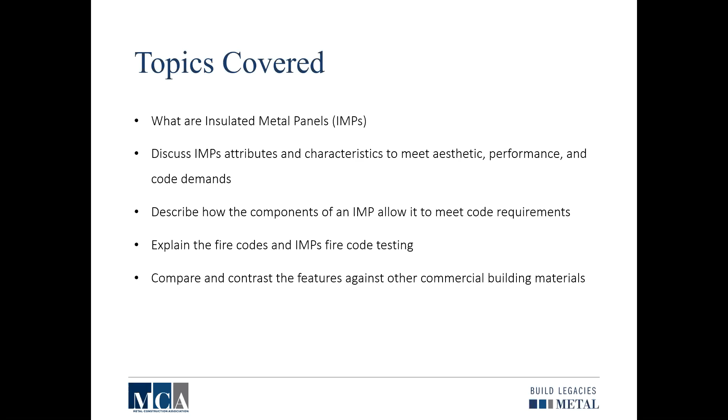So just to recap, the IMP Alliance is part of the MCA. The IMP Alliance is comprised of various manufacturers within the industry that not only manufacture the product itself, but also some of the key components, such as Huntsman and BASF, and Sherwin-Williams from a coatings perspective. Our focus is really twofold: we have a technical division as well as a marketing committee. The technical committee focuses on performance testing, initiating research, and increasing the use of insulated metal panels in the building envelope. Our marketing group reaches out and gathers that information, getting it into individuals' hands to help educate how IMPs could be beneficial in the marketplace.

So we'll get right into it. What is an IMP? We'll watch a quick video about what an IMP really is from an application and performance standpoint.

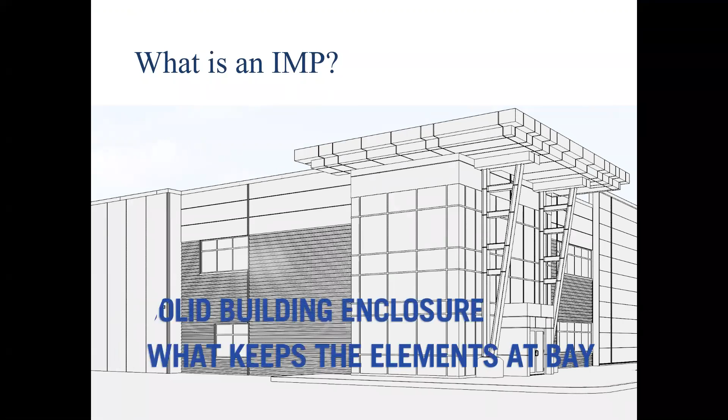A building enclosure plays a crucial role in dividing the interior and exterior environments to keep what's inside in and what's outside out. These elemental forces, known as hygrothermal loads, include water, air, vapor, and heat. Insulated metal panels, or IMPs, create a single barrier against these forces across the entire building envelope, replacing complicated multi-component assemblies with a simpler solution for architects and contractors alike.

So as you can see, from an application standpoint, it really is a single building component that can be applied in various ways and orientations to really change up the design of your product. Let's take a deeper dive into how an IMP is actually manufactured.

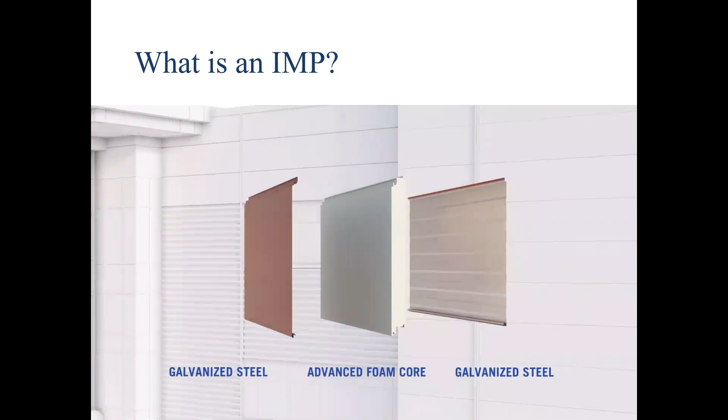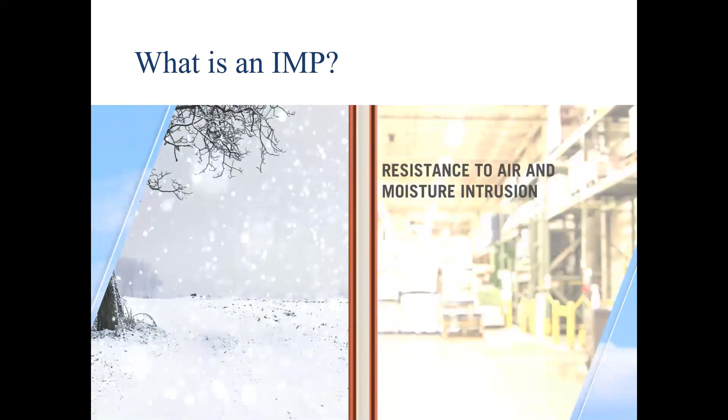Composed of two sheets of cold-rolled galvanized steel and an advanced polyurethane foam core, IMPs provide a pre-manufactured perfect wall. This metal and foam composite construction creates a rigid panel far stronger than the individual parts. The perfect wall can be used in all climates, including cold, mixed, hot, humid, dry, and marine environments. The exterior water, air, and vapor control layers, as well as the outboard thermal control layer, are optimally configured to provide superior resistance to air and moisture intrusion, including rain and groundwater, and highly efficient thermal insulation via superior R-values.

So just a quick recap, an insulated metal panel is a lightweight system that can be applied either to your exterior wall or roof application. It is an insulating foam core sandwiched by two metal skins. They come in a wide variety of colors, widths, profiles, finishes, and can even be formed and curved into various different shapes and sizes.

Walls can be ribbed, fluted, or planked, as you will see here in a few minutes. Flat walls can be textured or striated. IMPs bring a level of performance to the overall building envelope that is efficient, sustainable, and easy to install. They are thoroughly tested and certified for performance standards, giving you the confidence you need for your building envelope.

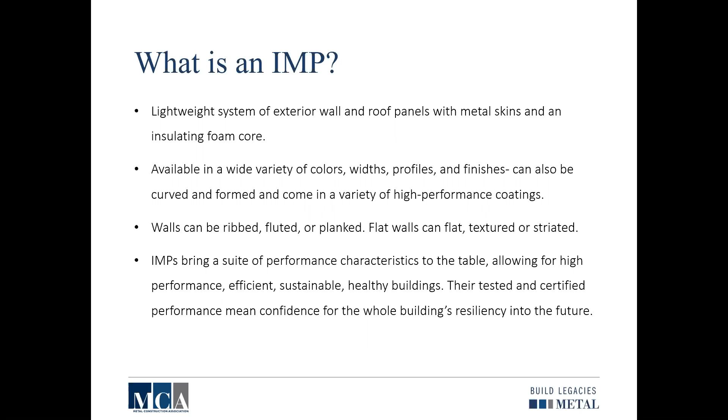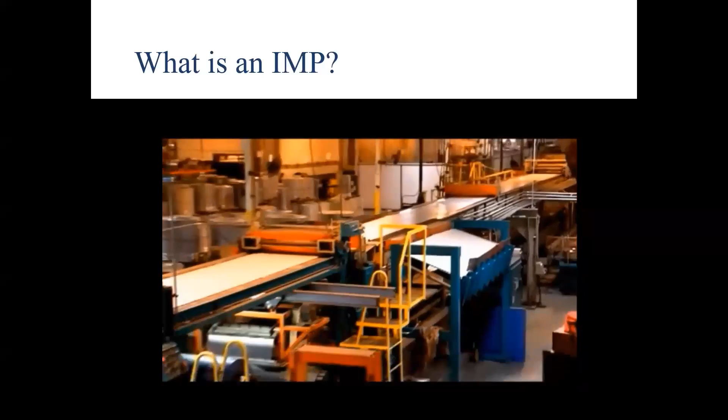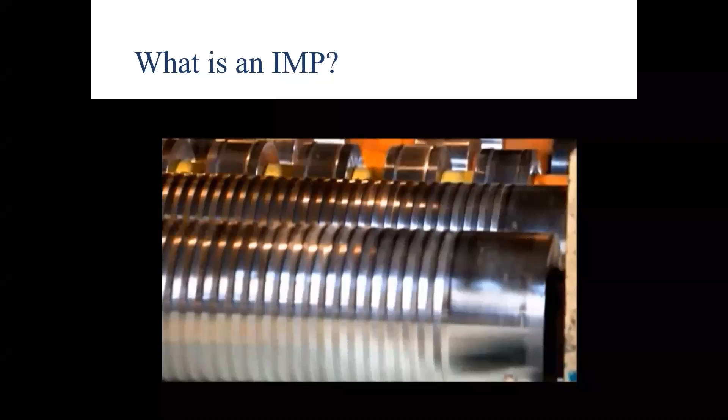Now, one of the great videos within this entire program is how this insulated metal panel is actually manufactured. So I'd like to take a moment to show you a brief video regarding how an insulated metal panel is produced. You can see here on the left side of your screen, the coil comes uncoiled on an uncoiler, goes directly into the production line where there are various dies and roll formers that fold the profile of the panel from the middle outward. You can see here in this video that they are separated by a little bit of a space.

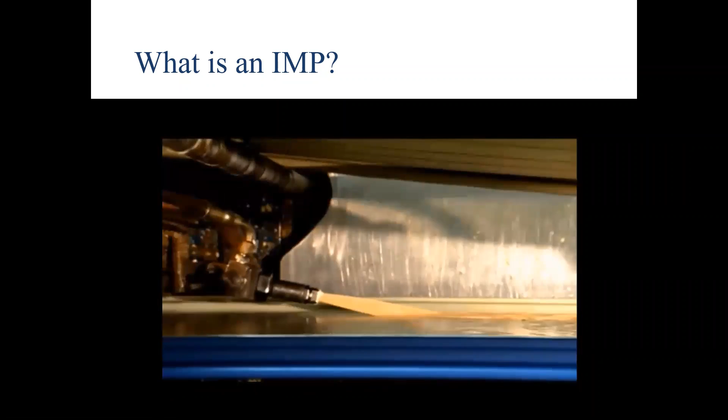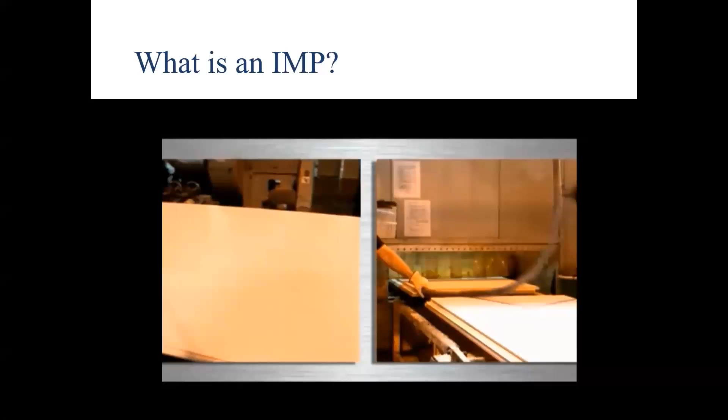Here you can see where an oscillating head will apply a liquid. It's actually the polyurethane or polyiso core. It has a rise to it as it's going through the line, and the liner side or the face element is sandwiched into the actual production. The product itself is cut to suit to meet your various project requirements, continuing down the line to make sure it's gone through various quality checks and offloaded to be bundled per your project requirements.

The only thing I would recommend if you are looking at longer panel lengths, make sure that your job site requirements allow for easy installation. Longer lengths require additional manpower to install, and of course are a little bit heavier. So make sure that based upon your design intent, the longer lengths are keeping within the installation process.

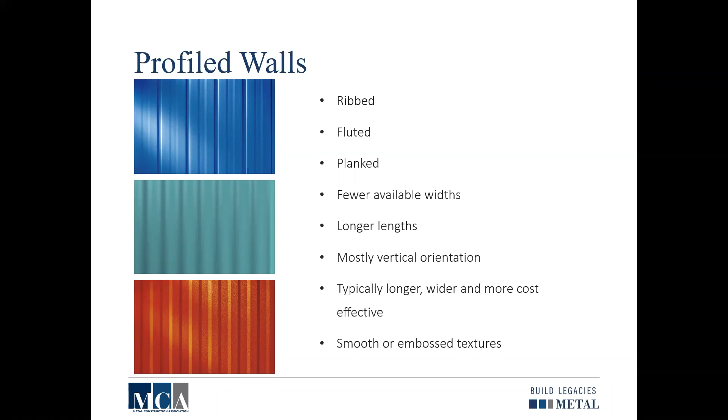Now, from a horizontal application, we typically see flat as the preferred method when horizontal panels are installed. The flat texture is also available as textured, where it's like an embossed or stucco finish, and the striated option is also available, as you can see there on the top left. These also come in variable widths, a little bit more customized, so the ranges can vary as far as what the availability on widths is. Again, horizontally is typical, but it can be vertically installed. These products typically are shorter, narrower, and can be more expensive depending on production capabilities and requirements.

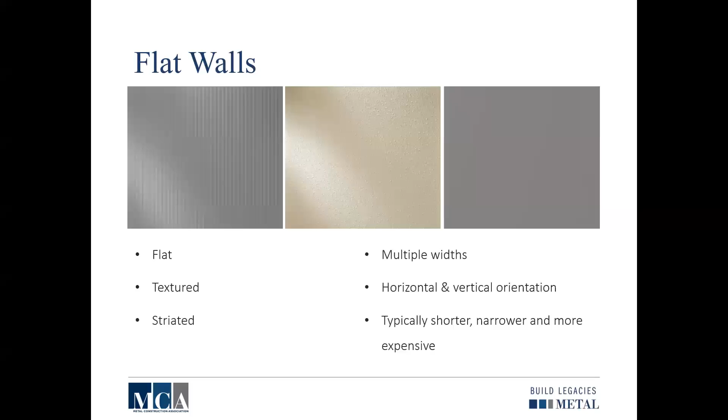Now, from a type of building standpoint, insulated metal panels can really be installed in any application. We have architectural, which is going to be your high-end building product, your more unique designs, more customization. We've got commercial and industrial, where we're looking at more of those vertical panels. We've got cold storage, and the product being installed in a cold storage environment - because of the thermal capabilities of insulated metal panels, that's really what drives the product to be good for cold storage application. One item that we won't really cover today, but is still available, is insulated roofs. Insulated metal panels can be placed in a roof application for thermal performance and structural integrity as well.

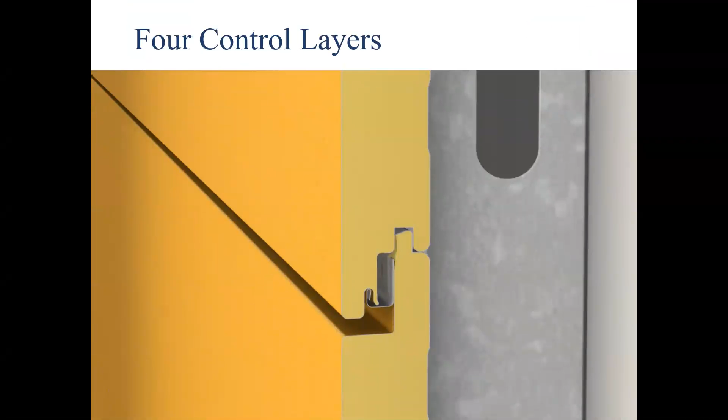So why IMPs? Well, first off, it is the singular building product that provides 4 control layers. I'd like to take a moment to show you another video in which we show how the product is actually installed. You can see here we have interior gypsum being installed on the inside of a stud frame, and then the panel itself is being installed horizontally over the stud framing, directly to the stud framing. There is no additional weather-resistant barrier or exterior gypsum required for the actual product. As you can see here, we have 4 control layers. The product itself is going to provide air, vapor, water, and thermal performance control.

On the liner side is a pocket which has non-curing butyl, and that non-curing butyl is continuous within that liner side joint, and that really provides the air, vapor, and water performance. The thermal control is provided by the polyiso or polyurethane core that we've mentioned earlier.

The exterior metal skin is really your first layer of defense. That's going to allow for any wind-driven rain that might be hitting the product to not be absorbed within the foam. The foam itself is usually about 90% or above closed cell foam, so it's not going to be absorbed. You don't have to worry about any mold or any type of water infiltration.

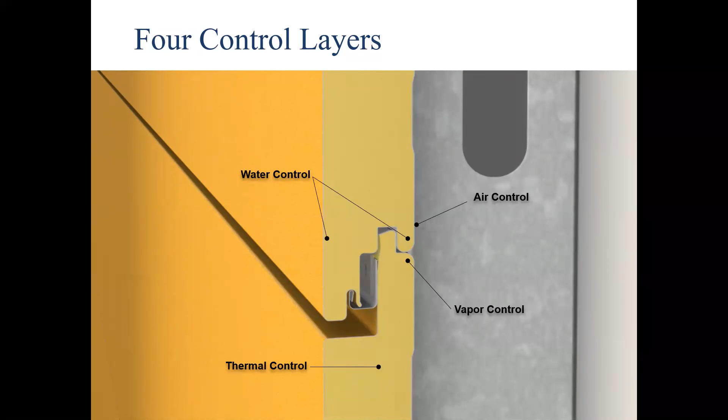Each individual manufacturer has a unique design within the product and how everything comes together. The clip system is proprietary to individual manufacturers, but for most products it is concealed, where the secondary panel comes down over and hides that fastener. Because of the way the joint is designed, it does not allow for any water to be pulled through into the interior of the building.

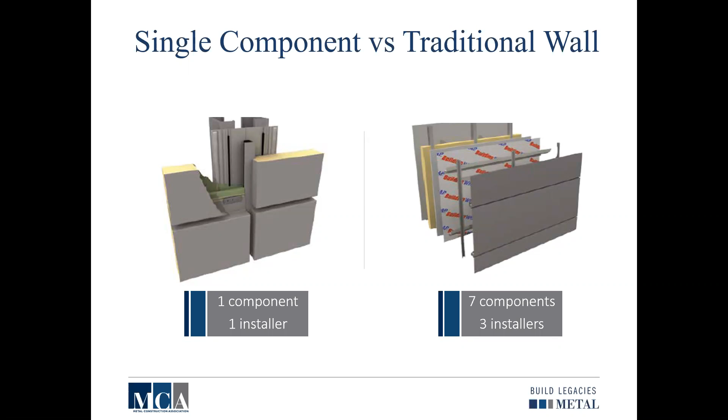One of the key components to insulated metal panels is the installation. Whenever we're looking at insulated metal panels on the exterior side of a building, we've got one component. We're putting together the insulated metal panels and the accessories associated with that product. There's one installer. With a traditional wall system, we have 7 different components, and there's coordination required with 3 different installers. So a lot of time needs to be taken into account with a traditional wall system for coordination and timeline. With insulated metal panels, it's quick, easy, and efficient. You install the insulated metal panel and move on to the interior from there.

Insulated metal panels go through extensive testing. Whenever we're looking at water and air performance, which is always a very hot topic with wall consultants, we want to make sure that we're providing every testing necessary to ensure the building product is doing its required performance testing. So we have ASTM E283 and ASTM E331, the two standards for air leakage and water penetration for not only insulated metal panels but any curtain wall application as well. If you do have a question or concern regarding performance, always ask the manufacturer to provide that level of test reports if required.

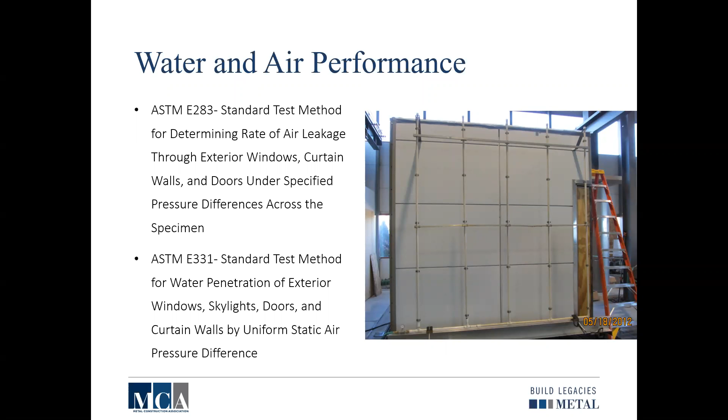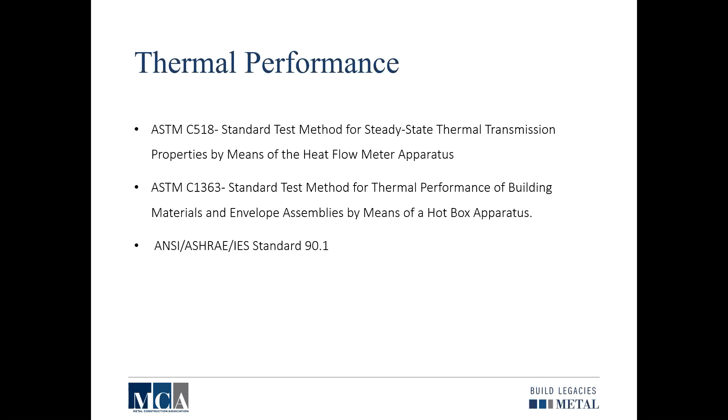From a thermal performance standpoint, we have ASTM C518 and ASTM C1363. 518 is going to be testing the product itself for an R value. 1363 is more of an assembly test in which we're testing the joints associated with the product. No matter what testing is conducted, we're always following ASHRAE standard 90.1. From 90.1's perspective, we have different zone requirements which drive the different R values required within the product.

Insulated metal panels can be installed in any application. They come in various depths so that we can accommodate the different requirements in R value. For example, down in Florida, you might only need a 2-inch panel to meet code, whereas up north you might need something a little thicker, like a 3 or 4-inch panel.

Whenever it comes to ASHRAE 90.1, the frequently asked question that comes up is about meeting the code requirements. We're looking at this from a prescriptive method, meaning that we're not looking at the actual metal frame wall construction, 16 inches on center, and the R per inch plus a CI, 7.5 in some areas. What we're actually doing is turning the page. I always recommend turning the page within ASHRAE 90.1 to the prescriptive method, where we're looking at the U factor. The product itself will be applied as an assembly, and therefore should be looked at from an assembly standpoint for thermal performance.

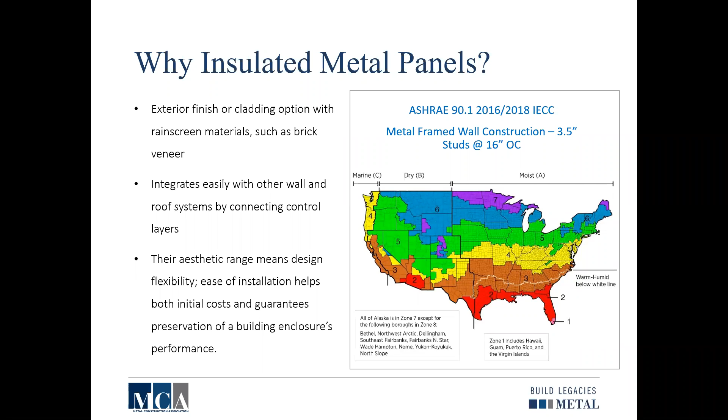Structurally, we are always focused on ASTM E72, which tests the capabilities of the product itself. E72 tests the product to failure under different conditions and methods, focusing on the product itself. ASTM E330 is typically partnered with ASTM E283 and E331 for testing. Whenever we're testing to an ASTM E330 standard, we're picking a wind load requirement and testing to that wind load.

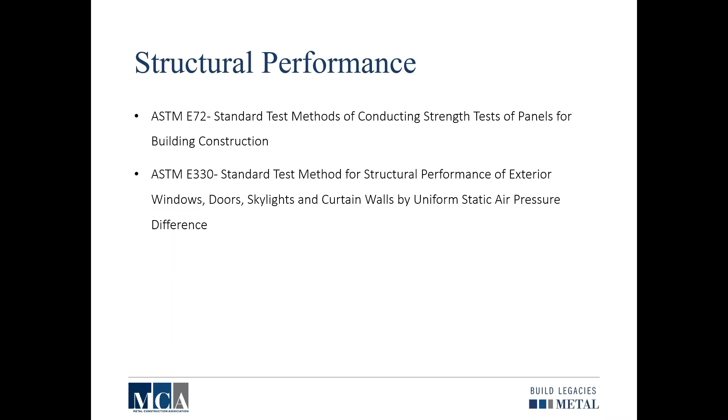One of the items that has become a more frequently asked question with insulated metal panels is the fire code. First thing to mention is that IMPs fall under Chapter 26 of the IBC, which is the foam plastics portion. A lot of people think that it might fall in Chapter 14 with the MCMs.

Although we start in that chapter, we tend to go ahead and float over into chapter 26 fairly quickly whenever we get into the exception criteria of requiring a foam plastic. So insulated metal panels go through the stringent testing of chapter 26. Every test that is listed within that chapter will go through here today.

ASTM E84 is going to be your standard test method for surface burning characteristics. Usually this is based upon a flame spread and smoke development number. The flame spread cannot exceed 25. The smoke development cannot exceed 450. Those tests are conducted on the product in itself.

NFPA 259 is a potential heat of building products. This is also a key component to a portion of NFPA 285 that we'll talk about in the next slide. NFPA 268 is the standard test method for determining ignitability of exterior walls, commonly referred to as ignition.

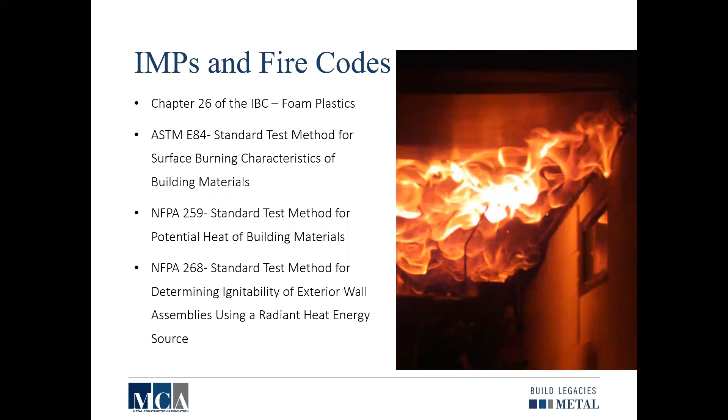So from a fire code perspective, we have NFPA 286. This is going to be your room corner test, where our crib you can see on that left picture is installed on the interior side of a room, and it's set on fire to determine how the flame would propagate either up the wall or along any of the intersections. So the corner condition as well as the roof to wall condition where the two meet.

NFPA 285 is probably the most talked about test required in the industry so far. 285 is a multi-component wall assembly for the evaluation of flame propagation. When the product is installed, we not only test the fire from the interior of the two-story building, but also on the exterior. So there's an interior and external burner that is sandwiched on either side of the product.

The way in which the product is tested is how it's installed. There's a window opening within the test, and every component really is a focal point. Based upon the standard, there needs to be certain criteria that is maintained within the test to go ahead and pass. This is a pass-fail test.

And that's going to be, if the flame in itself hits 10 feet above the window head, if the temperature at that 10-foot marker exceeds a specific number, if there's thermocouples located throughout the wall assembly to where they have certain criteria that needs to be maintained. If the product in itself is tested and passes the 30-minute test, then you get the pass of the NFPA 285. The key component with 285 is that the wall in itself must be constructed as you typically see.

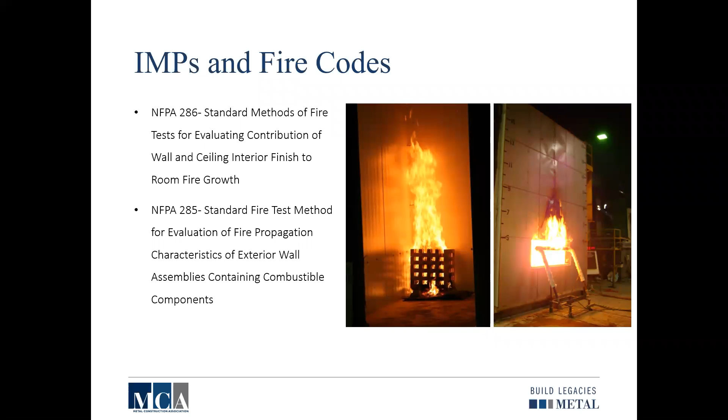In addition to the extensive testing that insulated metal panels go through, there is a special approvals portion of Chapter 26 where some of the special approvals mention factory mutual or underwriter's laboratory. There are independent third-party entities that will evaluate the product in itself, not only from a product specific perspective, as in the case of FM 4880 and explaining how the product handles under fire properties, but also from an application standpoint with FM 4881, which is a structural test. 4471, as listed here, is for roof application.

Underwriters Laboratory have similar tests in regards to their requirements. And Factory Mutual and Underwriters Laboratory are not the only two entities that will allow for a certification, labeling, and listing program. There are other third-party certification bodies that will review the product in itself and provide certification to code compliance.

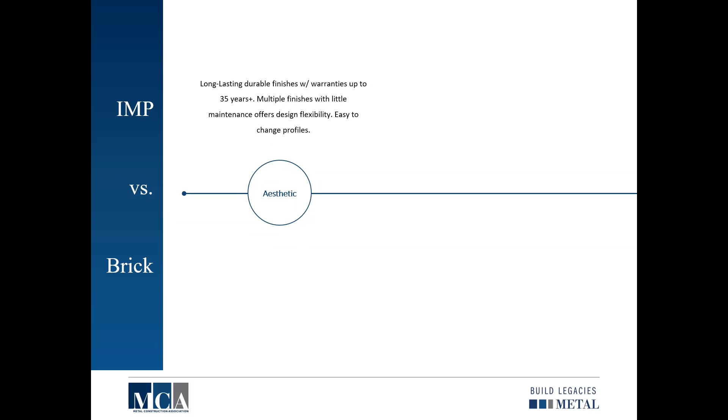So whenever we're comparing IMPs to other systems, we'll just take it from a high level. IMPs versus brick. From an aesthetic standpoint, IMPs are long lasting. We mentioned as far as the finishes, the maintenance on the product in itself is very minimal, and yet the product is still providing that design flexibility. From a brick perspective, we've got a large range of solid or variegated colors. Typically they're matte finish. They can be painted or stained after finish from an aesthetic standpoint.

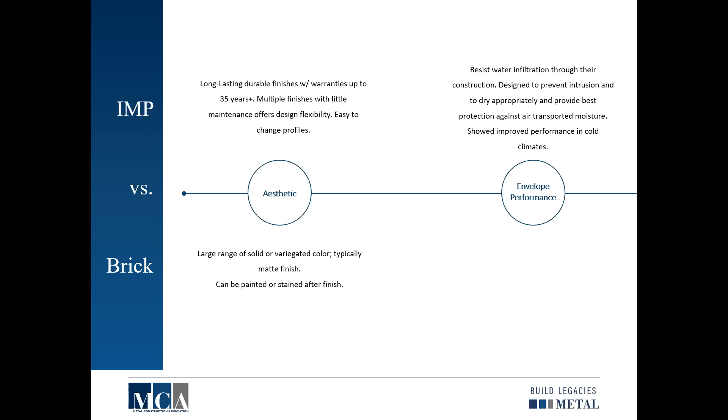Envelope performance, we're looking at the IMPs as the main line of defense. It resists water infiltration through the way in which the product is designed and constructed and installed. Installation is critical. It's designed to prevent intrusion of water and protect against air, moisture, and vapor barriers. It can be installed in any cold climates as well.

From a brick perspective, you're still looking at that brick. It can absorb water. It does go ahead and dry out through evaporation, but you still require an additional backup system to provide that insulating property for the wall application and the thermal performance.

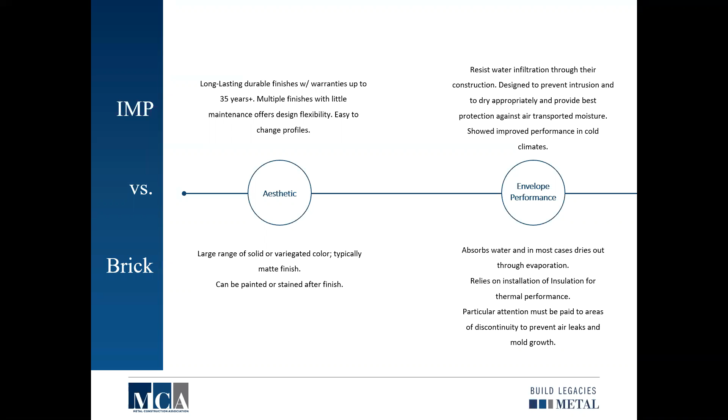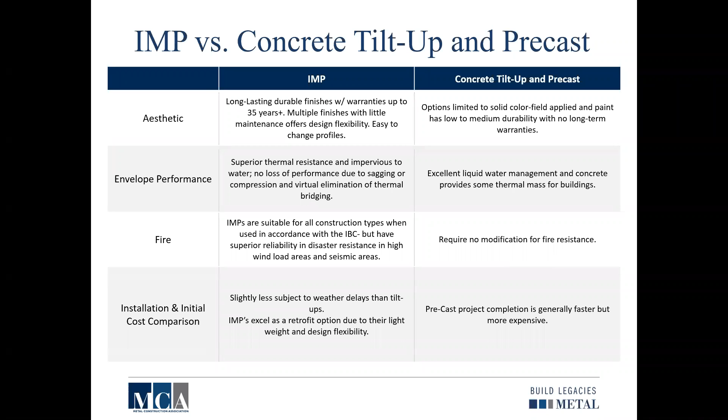From an install and initial cost comparison aspect, right now insulated metal panels are subject to less weather delays than tilt ups. They are excellent for a retrofit option, and with the concrete tilt up and precast, the project completion is generally faster, but can go ahead and be more expensive.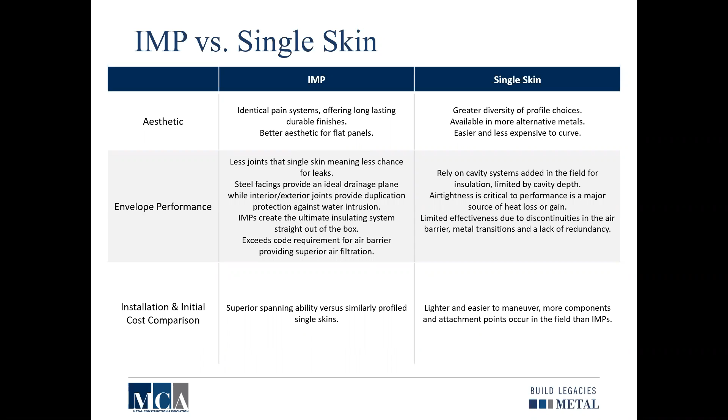There are steel facers that provide an ideal drainage plane, while the interior and exterior joints provide protection against water intrusion. From an installation and cost comparison, insulated metal panels are superior because they are a structural building product, meaning that they can span greater distances versus a similarly profiled single skin product.

So just to recap from an IMP performance perspective, IMPs usually come in a wide variety of different widths, depths, lengths. We can go ahead and apply them in a lot of different applications, from architectural, commercial, industrial, cold storage, and roofing. It is a single component that provides 4 control layers: air, water, vapor, and thermal performance.

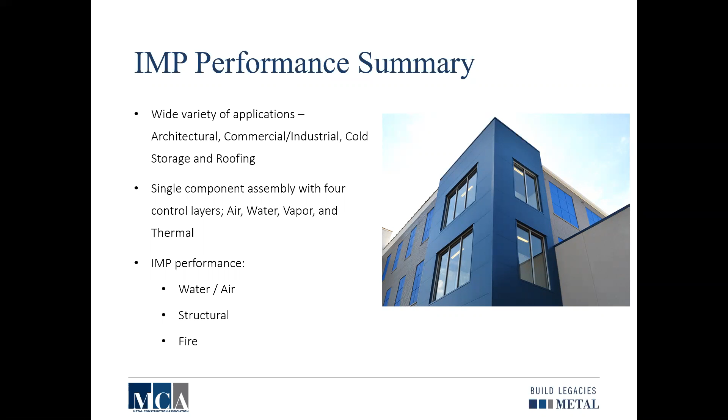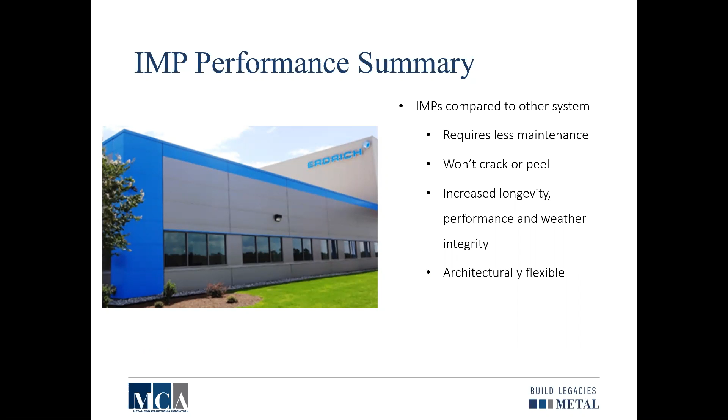The IMP itself has been tested in accordance with various air and water testing requirements, as well as structural, fire, and thermal. IMPs, compared to other systems, require less maintenance. You don't have to worry about the product cracking or peeling over time. It has longevity, high performance and weather integrity, while providing architectural flexibility to meet your project's design intent.

So at this point in time, we'll open it up for any questions that might have come through.